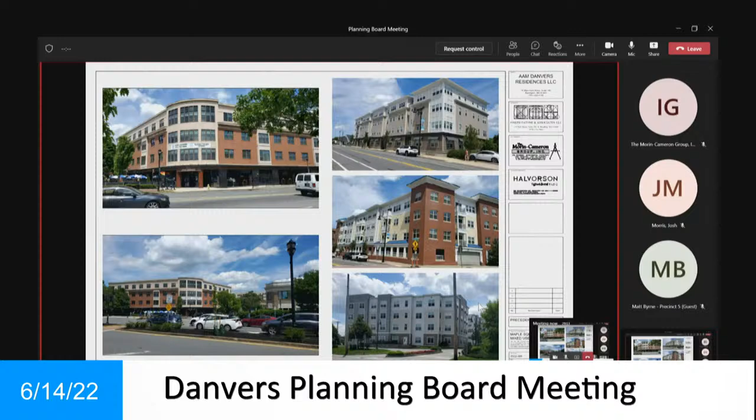So those were the precedents I looked at to present similar projects on the North Shore.

This next slide is just a section of our building at Maple Street and the adjacent Atlantic Ambulance building. As discussed before, our building is 49 feet from average grade to the top of the roof surface, and it is a flat roof.

In the middle of the top of the roof there's just an indication of HVAC units and screening. I wanted to make clear that all the HVAC units are towards the middle, or centered on the middle of the building, so they won't be visible — you'd have to be very far away for the angle for anyone to be able to see them from a street line.

We are anticipating screening the units anyway, both for visual and sound considerations for any adjacent buildings, which I'll address the acoustic issues for later on in the presentation.

So we're anticipating the screening to be approximately 5 feet tall. It is going to have a number of residential HVAC units, probably one per unit, and then there's going to be some HVAC units for the commercial spaces as well. But again, everything clustered towards the center of the roof.

And then we obviously have elevator penthouses, because we have the 4 elevators. Those are going to be about 6 feet above the roof surface. The cornice line, again, is anywhere from 2 to about 4.5 feet, depending on which part of the building. So again, those are going to be substantially covered, unless you're in an adjacent tall building or very far away, at which point they really wouldn't be discernible.

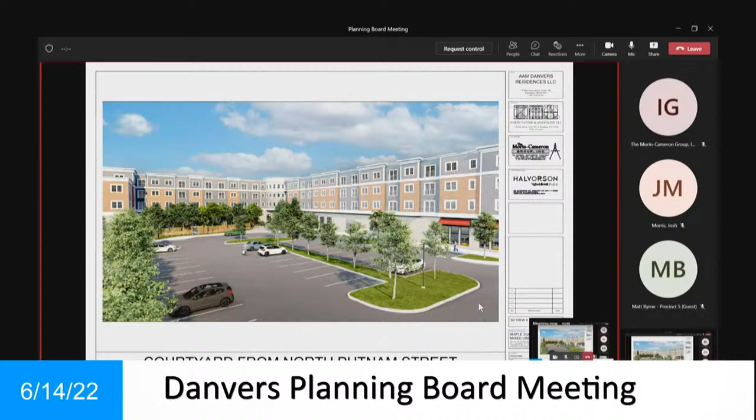This is a view of the inside courtyard of the building from the corner of the parking lot towards North Putnam. You can see the rhythm of the materials and the bays on the inside face of the courtyard, the different materials, and awnings wrapping around the restaurant space towards the parking lot side to provide more interest and activation. You can also see how heavily landscaped the courtyard is.

Are you proposing any signage on the awnings for the retail or restaurant space? Not at this point, I don't think we're anticipating that. We've got signage, which you'll see in a later slide, over each of the commercial entries. Okay, and they're just flat signs against the building? Right, we would like to keep them as simple and clean as possible.

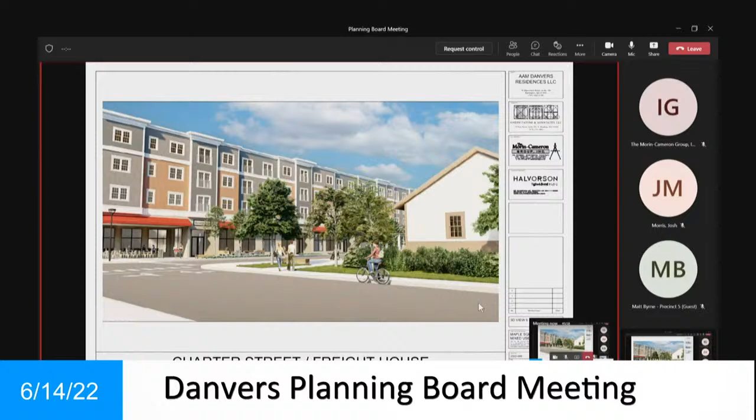Looking at the outdoor dining area for the restaurant from Charter Street and the corner of the Freight House. To address your comment, we've got a commercial entry for the restaurant here with a sign and awning. These entrances have been made wider and splayed out in the plan for more rhythm. We've changed the window layout so things line up better vertically, and in some cases they line up better with the windows above. Again, commercial entry signage, then awnings - you'll see it better at one of the other views.

This is a view looking down Maple Street, from Maple Street towards the Freight House, looking down Hobart. Again with the awnings, you can't really see the signage at the commercial entries because they're linearly behind the awnings.

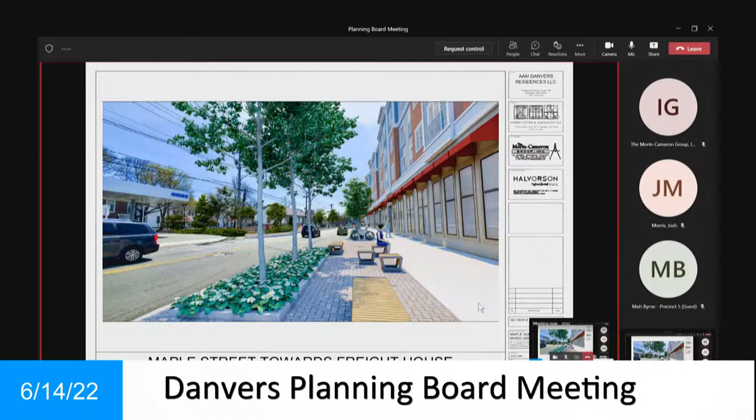Maple Street looking - I've got it marked north, but it's actually probably more west - you can see the height relationship of the Maple Square project to the Atlantic Ambulance Building, and what we've done with the entry canopy, the window layout on the curved piece, and the higher cornice line, which reads more distinctive now, a bit more detailed.

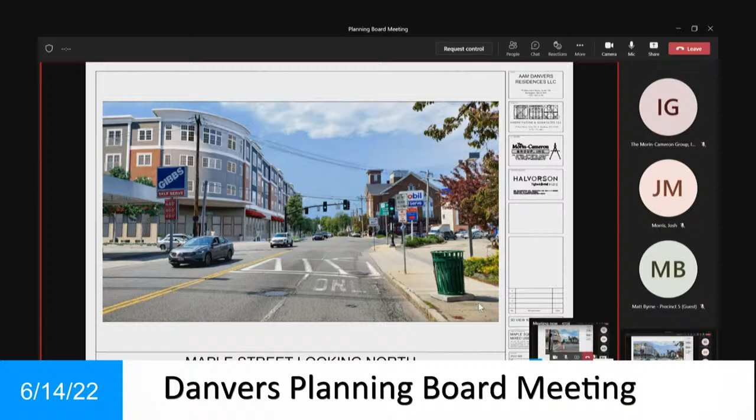Okay, and these are just the exterior elevations in color. The top one is the Maple Street side. The bottom one is the Hobart Street side. And next page, Jarrett.

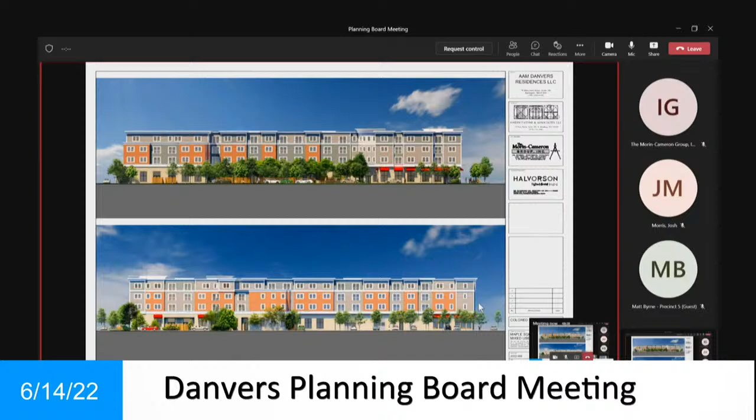This top one is the courtyard, the back of the building, as you're looking from the parking lot, looking from south to north. This would be the end of the restaurant space. The Freight House is over here. This is Hobart Street, and then North Putnam Street at that end, the three-story section along Putnam Street, North Putnam.

And then this is the North Putnam Street section elevation. Again, this is the extent of the building from here to there on North Putnam. From here to there along North Putnam. And this piece is 3 stories, and from here on, which is kind of the extent of where the parking lot is.

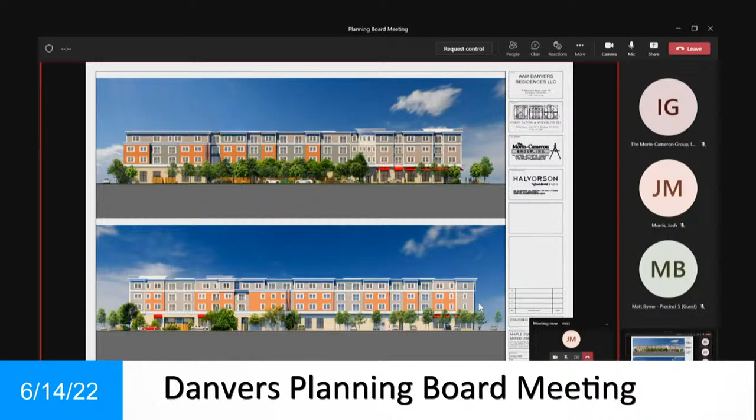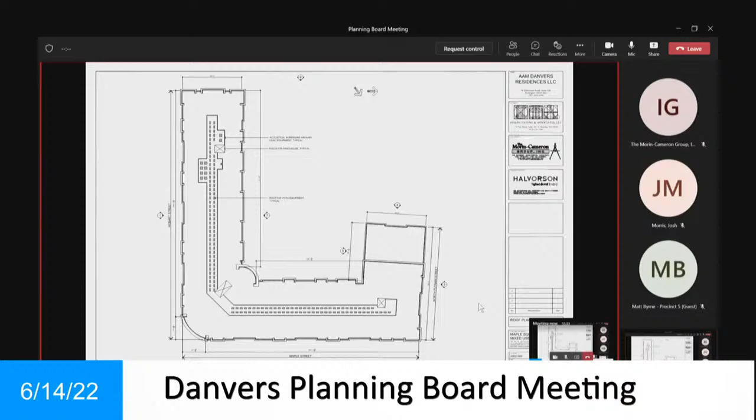We do not anticipate any impact from noise from rooftop units. I've talked to an acoustical engineer. When I told him, I sent him over a set of the plans, a site plan. His comment to me was, with the height of the roof, the impact, if any, would be minimal. And then when I sent him cuts of similar HVAC units that we've used on another apartment project, he did not think that that would be a problem at all.

The screening that we have now, we're showing just to hide the equipment. There is also acoustical screening that's available, that if that is something that's necessary, that's something we will implement. The units that we have specified in previous apartment buildings are 58 decibels. That equivalent is conversation in a restaurant or an office space. It's not loud at all.

So granted, there's a lot of units there, but the height of the building, the distance from the residential uses, we don't anticipate any noise impact at all. And if there is any issue, we'll be addressing it. We'll be analyzing before things get in place.

I would assume that you'd have a big hatch, because if you have a problem with those units, short of having a crane get up there, you'd want to be able to. Yeah, big units typically do get craned in place.

Anything for the commercial units? Spaces might, yeah. The residential units, they're not much bigger than a suitcase. I think the ones we specified for the other apartment project, which are similar in size to these, are like a foot by 18 inches by 30, maybe. They're not big, and those can be carried up through a roof hatch. Realistically, during initial construction, they'll be palletized and craned up into place just for efficiency of moving material. We anticipate the roof hatch would be 4 feet by 4 feet, something like that. It's not going to be huge.

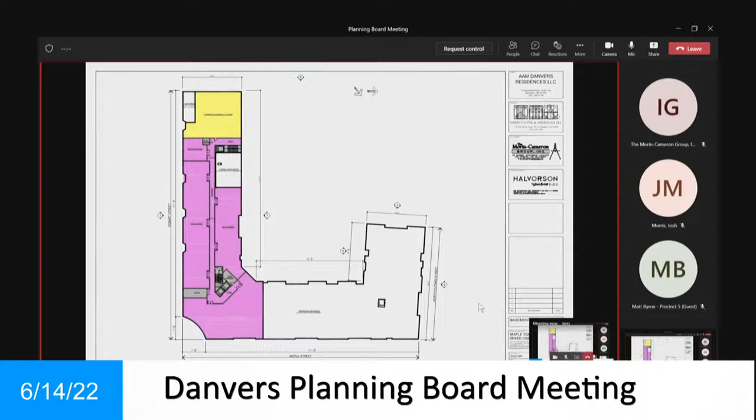You briefly saw there that they're looking at fixtures along Maple and potentially along Hobart. I think they're still having discussions with the planning office about exact locations for pendant fixtures. You can see in the right-hand corner the variety of fixtures the town has been discussing, so I tried to provide a diagram showing different fixtures in different locations.

If we look at fixture C, in the middle right, you can see it as it looks on a pole on the left-hand side, and then a close-up of what that lantern looks like. That's what the city has been proposing now for Maple Street and Hobart Street, shown in both locations as a continuous fixture along both sides. The thinking is that they may carry that further downtown so there's a unified look and feel.

Then for lighting fixture B, keeping with that same historic appearance—in the upper right corner you see the pole and light, illuminated, and an enlargement of that fixture. We were thinking about carrying that motif over into the freight parcel park, so within the public realm you'd have a consistent look and feel.

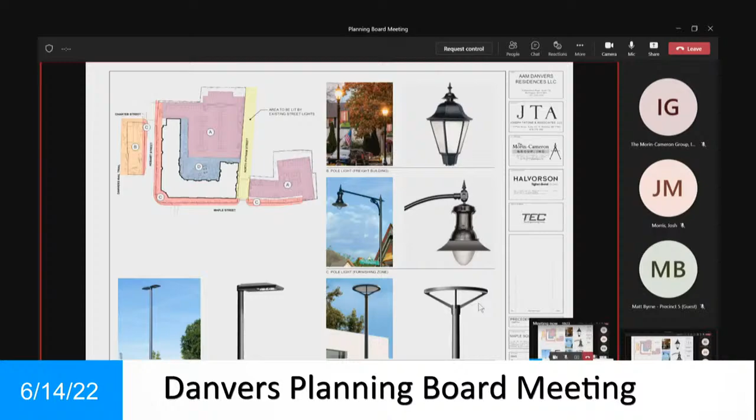We would pretty much agree to work with the town on whatever they come up with to keep uniformity. We've already started that discussion on Maple and Hobart Street, but we wanted to show you that we can do that with these cut sheets. Great, thank you.

Looks good. Anything else? You want to go over the fencing and the amenity space, just so we can see what you're proposing there? I think there was some depiction of that. I know there was.

We aren't decided on color of the metal component, but both the areas adjacent to the patios, in the upper right-hand corner, it's the look and feel of the screens between the amenity terrace and the patios, a vertical wood slat with metal supporting it off the ground. In both instances, the hardwood we're showing you with a Penofin finish would be the wood finish for both.

In the upper left-hand corner, it's the look and feel of the separation from the patios from the amenity space, where it would be planted up. In the bottom left-hand corner, we're thinking a more horizontal approach for the separation between the parking lot and the amenity terrace area, with the same materials: verticals being painted metal in a complementary finish to the architecture, and the wood slats being that same hardwood.

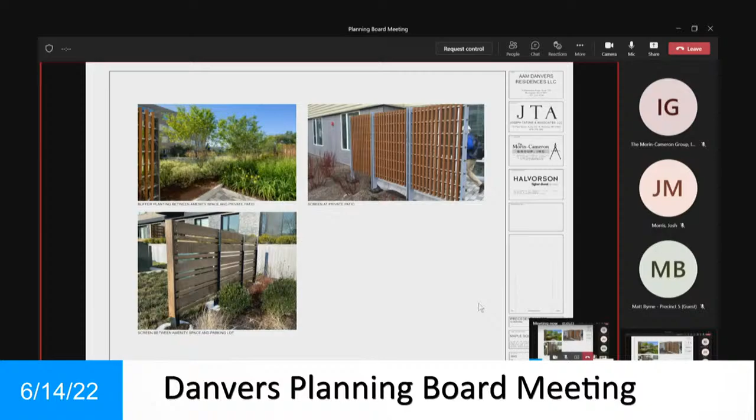I asked at the last meeting about potential amenity use on the farther parking lot to the right of the building, if you go back to the site plan. Yeah, the team concluded we didn't think that was an appropriate location, given it was a satellite parking lot. We didn't want to encourage people to be hanging out there. It was just more for parking, but we were going to encourage people to either utilize the freight park or the amenity terrace behind the building.

Okay, and snow storage? Do we have that, are you going to review that, or Scott, do you want to speak to that? Did anyone else have questions before we jump to snow storage?

Thank you. So, good evening. For the record, Scott Cameron with the Morin-Cameron Group, 66 Elm Street in Danvers.

We did a calculation on the snow storage, and what it amounts to, without exceeding a 6 to 8 foot mound, you're talking about a 12-inch storm. So it's quite a bit, and that's over the paved surface area of the property, which had a lot of area for snow storage, and that's before they would have to do any removal of snow.

Additional questions from the last meeting for the engineer or the team, or the architect? Can you comment about the construction timeline ideally? I know with construction, there's never anything that goes according to plan, but the key milestones for site work to start - Scott, you talked about it last time, but for the benefit of the people here tonight and watching - getting the building weather tight, could this be phased, or is it a one build out? And ideally, when would an occupancy permit potentially get done? Assuming supply chains and all that, how long should this take? This is a very significant project, big investment by the developer in the town of Danvers, but this is going to be a multi-year project.

Jarrett can pull up the site plan that shows what we're proposing, which is right in, right out, to address specifically your concern. The original proposal allowed left turns, people waiting to make that left turn, headlights potentially going right across the street into your residential area. Okay, so that's why I wanted to see the plan.

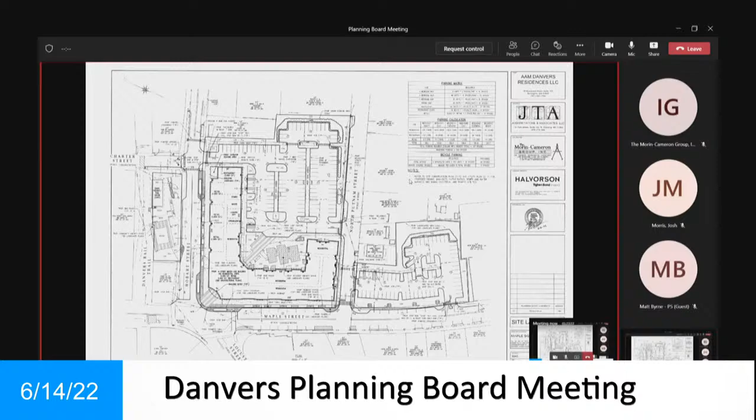So, Scott, would you like to speak to that, or would you like me to do it? Actually, go back to the site plan. Well, first, while we're on this, you can see that.

Bob Ulick did the landscaping, but he added in a lot more screening here. You can see how many trees and shrubs are in this area, and this addresses the head-on parking here and potential lights.

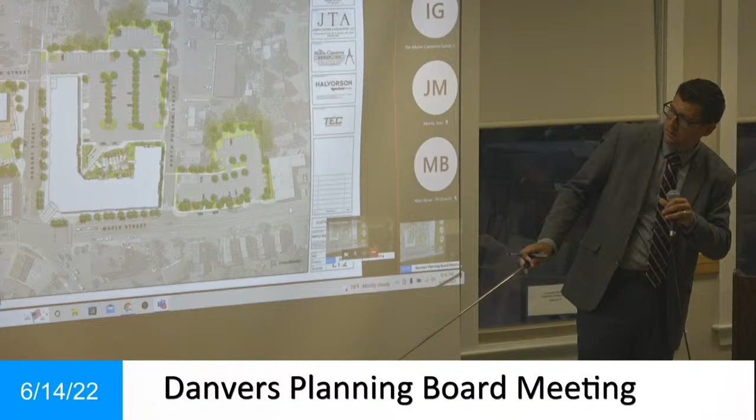And if you go back to the site plan, here, so we added an island in the middle, and we angled the exit so that the cars now come out and they'll be angled kind of towards the adjacent traffic.

So it's a right in, and then it's a right out. Instead of 90 degrees to the street facing up your driveway, it's going to be on an angle coming out. And where it's a right out, you don't have cars stopping to take that left turn and wait, so it's a smoother and quicker turn.

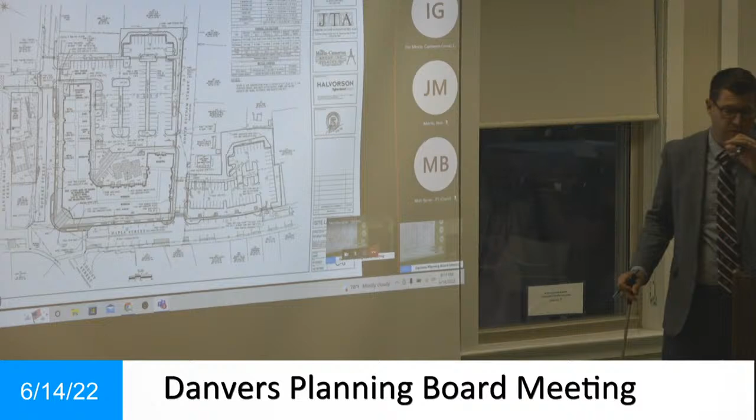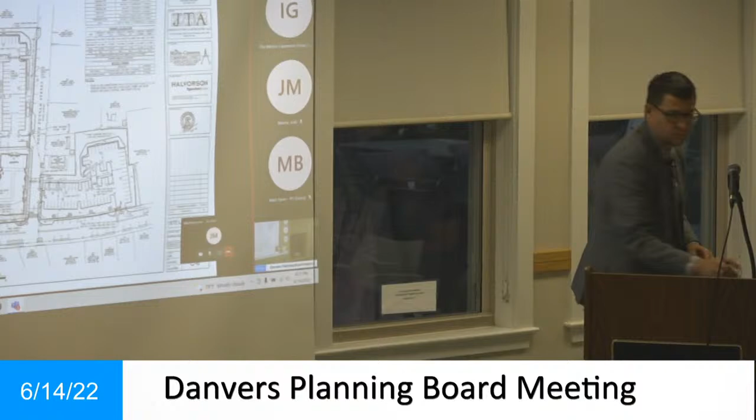Other questions? Mr. Bates, saw you first.

Good evening, Bill Bates, Town Meeting Member, Precinct 4. One of the things I wanted to talk about is just to understand why the step backs are not in there, and I guess that will be a special permit. But as a longtime town meeting member, I'm excited about this project. This is what we wanted. We wanted walkability, we wanted apartments down there.

But we were real careful when we developed these guidelines, that you had to have a specific step back on those buildings to get a certain height. And I would hope that the planning board would hold to those commitments that were made to us as town meeting members, that they were going to be upheld.

There's always a chance of a special permit, and anybody can ask for a special permit, but I'd like to hear a discussion about why this building is not stepped back a little bit more. This first picture here is gorgeous, but we talked about that being stepped back, and that's very important to me as a town meeting member.

Thank you. Thank you, Mr. Bates. Attorney McCann, do you want to address that? Okay.

So we've met the intent of the bylaw and avoided the tunnel effect in a different way, but we've still met the intent. As Joe was saying, rather than creating step backs that would disrupt the architectural design of the building, we've realized the desire and intent by stepping the whole thing back and creating more public space. A step back of the upper levels alone doesn't create more public realm space, which we are able to do here, as well as eliminating the tunnel effect.

The bylaw—and I'll get into this later when we talk about special permits—allows you to grant special permits for design criteria, for design features, and this is one of them. We've asked for the special permit, and it should be granted if we meet its requirements, which we believe we do. As I've indicated in the application, we meet the intent of the bylaw, as I've just explained.

We meet the requirements for the various special permits that we've asked for, and this happens to be one of them. If you look at the intent, which is to avoid and prevent the tunnel effect, we've met that here with an interesting design that flows well, and on top of that, created significant public realm and public open space in front of these buildings, addressing another intent of the bylaw, which is to create pedestrian space and pedestrian connectivity.

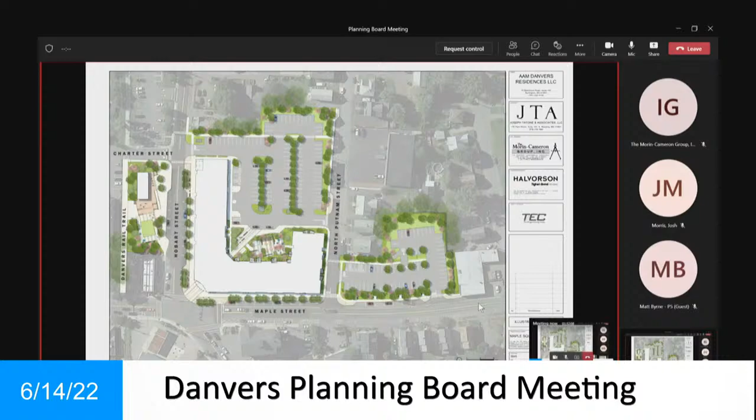Questions from the board on that point? Tori? Not exactly a question. I just want to respond to the public, to why I feel very comfortable with this lack of a setback. There's a park across Hobart Street, and then we have the old firehouse, which is very well utilized and hopefully long-lasting. I don't see any threat of a canyon effect on either Hobart or Maple Street.

And that is why I feel very comfortable with this special permit request. Thank you. Others? Peg? Well, I would feel comfortable too, given the situation and the fact that they do have such wide sidewalks, and they're providing for pedestrian access, seating, things like that. I remember when we went through the hearings, the step back was for the tunneling effect, but there was an angle, and you've got to be close to the angle of, how high is your building, 40 feet? 49 feet. You can't be that far off that angle and get across the street with those wide sidewalks.

That's right. Lou? Yeah, I share the view of Peg and Tori as well with respect to that. I'm not as obviously cognizant of it, but I think that I'm satisfied that we don't have a concern in terms of the tunneling effect, and I am also happy that the building is set back, so there is a wider area for pedestrians to walk, and just additional space.